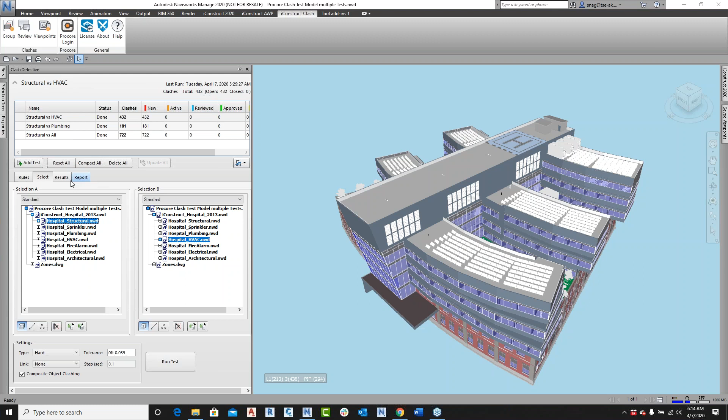But to get started here, I have actually 3 tests already. I've got structural versus HVAC, structural versus plumbing, and structural versus all. I don't have a lot of clashes in here, but there's enough to show you what I've done. If I go to the results here, you can see it's just giving me the clash names. So what I want to do is I want to start grouping these.

Navisworks does a very good job of helping you find clashes, but it doesn't do a very good job of helping you group them all together. And that's what I want to do. I want to reduce these numbers here. So what we're going to do, up here on the ribbon, I have what's called iConstruct Clash. I'm going to go here.

It's really mainly 3 buttons. I'm not going to look to upload into Procore today. I'm just going to do these 3 buttons. So let's go look at grouping our clashes. So this group dialog box comes up, and I can select all 3 of my tests at one time if I want to group them all the same way.

We come with some predefined ones already for you in here. So some of these are already predefined. Some of them I've already created myself. If you want to create your own, you just click in here and you just create one here. I'll just say it's Rob. And then basically you just drag and drop what you want.

So if I want to say, oh, I want the zone that it's in, and then I can specify what's a selection set and the property that I want to use that represents that zone. And then I could say, oh, then I want to do it by level from there. And then I might want to do it by a proximity distance and say I want to do it by 50 feet. And this is all based on the unit. So if this was in metric, it would actually say meters here.

And so this is how I'm going to group my clashes. So it's going to go by a zone, so different area, might be a room, something like that. Then by the level that it's on, and then by a proximity distance. And I'll just quickly save this. And now I'm going to go ahead and say, let's go ahead and group this. So what it's going to do, it's going to do all 3 tests at one time.

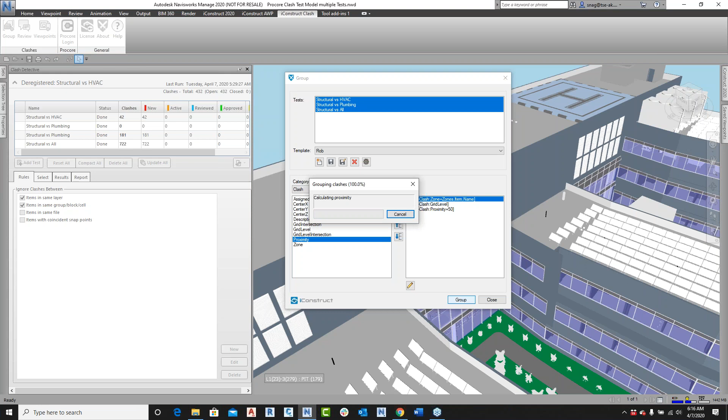It's okay here. I'm going to close this. Now I'm going to come over here. Now you can see the numbers. I had 700 and some clashes before. Now I'm down to 47 here. If I go to the results, now you can see we've actually given them a name that means something. So here I've got zone 3, level 6, and this is proximity group 1.

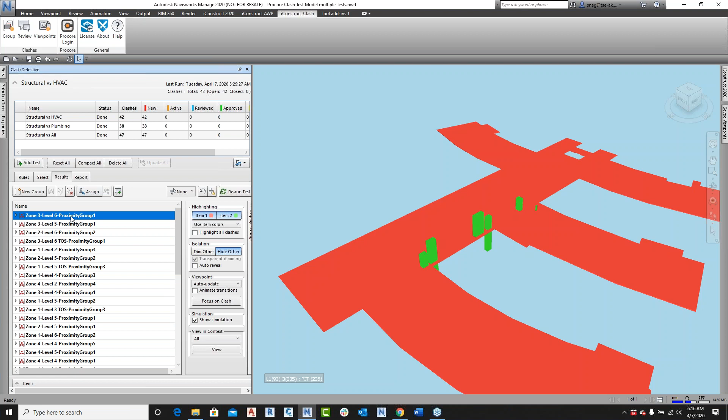Okay, so there's quite a few clashes in there. I could have made that proximity distance a little smaller so it didn't grab as many clashes, but what that was doing is basically saying, hey, if you got any clashes within 50 feet, group those together for me.

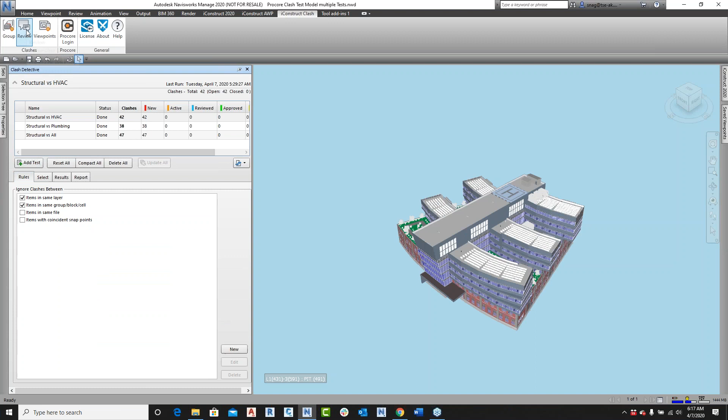So now I want to look at managing these. So I'm going to come up here to what's called the review tool. I'll bring up the review tool here. And this has gone through and it shows me all my different groups in here. And you can see this group here has got 44 clashes. Well, that's way too many clashes for what I need here.

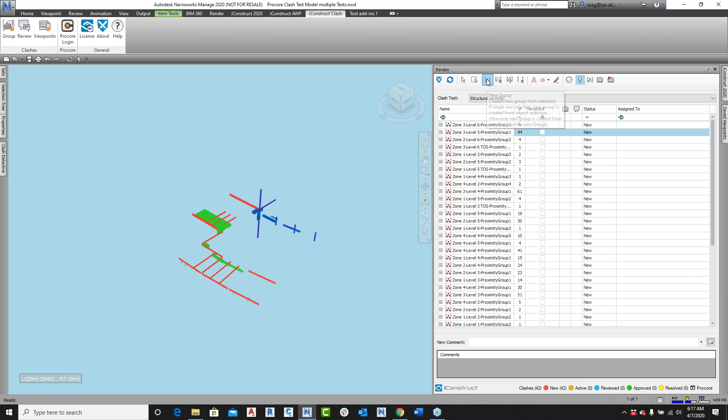So what I want to do is I'm going to say, yeah, I want to take these out and put them into another group. So I can just come up here and say, hey, grab all those and regroup those into its own group. Same thing. I don't really want these here. I want those into another group here. Let me just change the way I'm selecting down to first object. And then I'll just grab that. And that's put that into a group. And then same thing here. I'm going to put this into a group too.

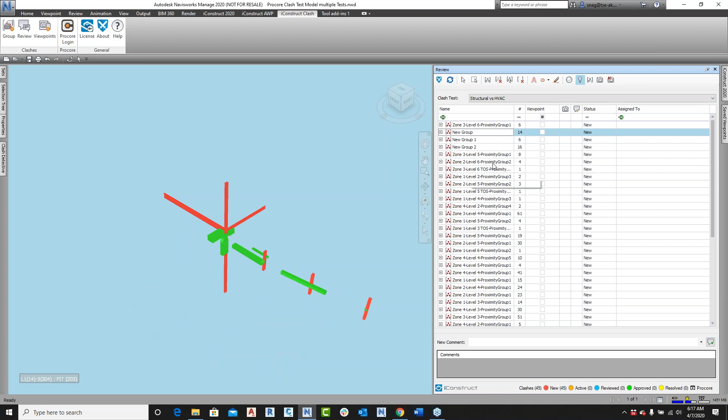Okay. So you can see that you can quickly and easily create your own groups from the ones you already had. We can rename these. We can put in, this is a structural versus HVAC here. I can put in some redlining here. I can put in some notes, and this will save it for you.

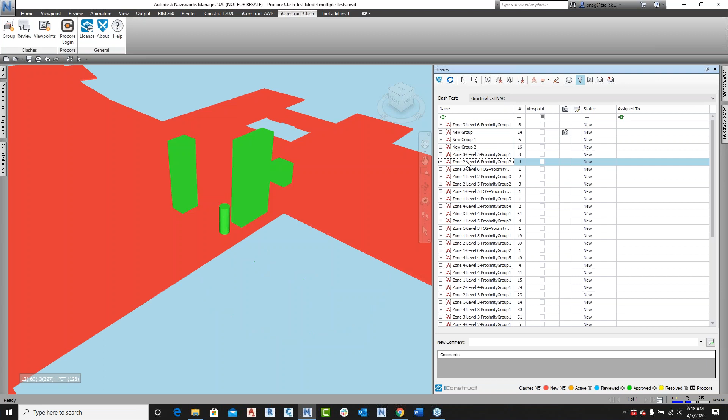Other things that we can end up doing is if I select these, let's just grab a few of these clashes here. I can go in and I can change the status here so that I've reviewed them. And automatically, once you've reviewed them, it puts a checkbox here. So this checkbox means, hey, I want to create a viewpoint, or if you are using products like Procore, that it would upload this into Procore.

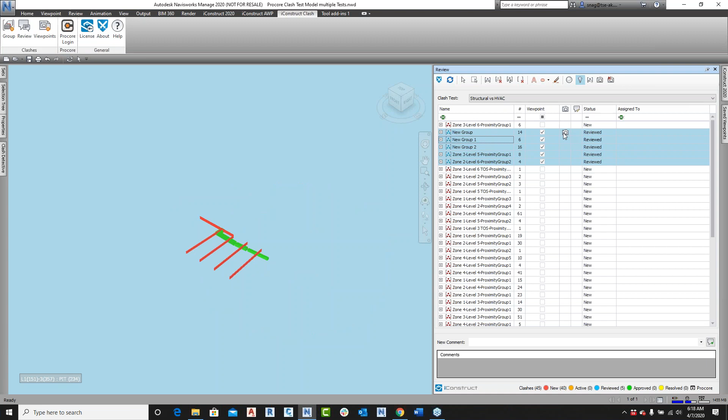As you can see here, the view shows I've created a viewpoint. If I just zoom in and then go to another one, you can see that one automatically grabs that and holds that view for you. And you can also go in and assign them to someone. If you're logged into Procore or something, it'll remember everybody that is associated to the project.

We can also put in comments down here. So I'm just going to say move duct, and as you can see, it remembers ones that I've put in there previously. And now I've added in a note to every one of those. Okay. And you can change the way that you're looking at this at any time. You can switch over to this. All right. So that's done.

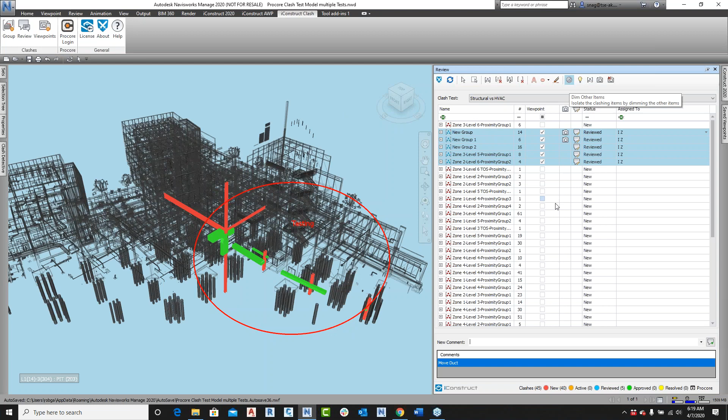There's a lot more we can really do inside this, but I'm going to go ahead and get out of the review tool. And now what I want to do is I want to create some viewpoints. Well, I don't have any at the moment. And so what I'm going to do is go in here to this viewpoints. Same thing. We have some predefined ways to be able to group your clashes or your views. And so in this case, I'm going to do the date, the test name, and then the level that they're on.

Okay. And then right now you can see there's just a box here. And if I expand that out, it's only going to do the ones that I have checked at the moment. Well, I've decided now I really want to do all my clashes, so let's just check them all. So I'm going to do all three groups. And if I just go create here, it's going to quickly go through and create a directory for me.

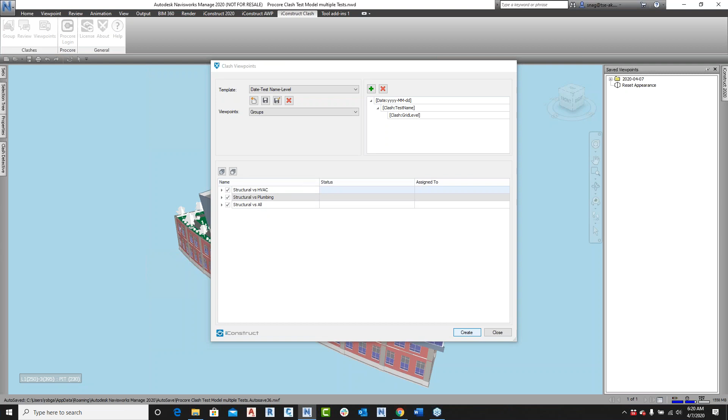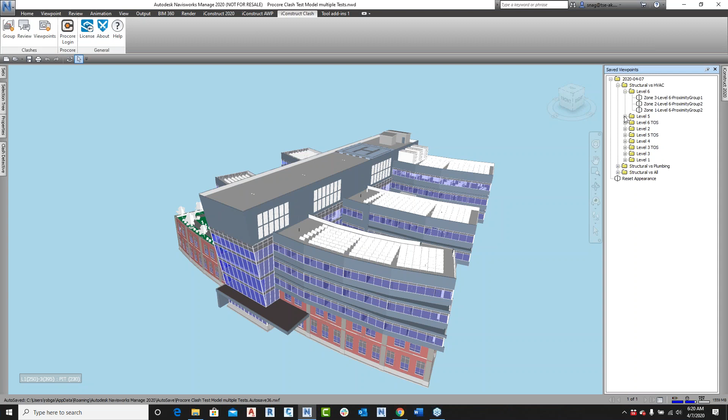Now, if you ever use the ones in Clash Detective, a lot of people go in here and actually create these saved viewpoints. Every single view goes into its own individual folder. Here you can see I've got one folder. There's the date, there's all three different tests, there's the different levels that they're on. If I go in here, you can see these are the ones that I did earlier, and there's that one that I created here. So we're managing all those clashes for you. Okay.

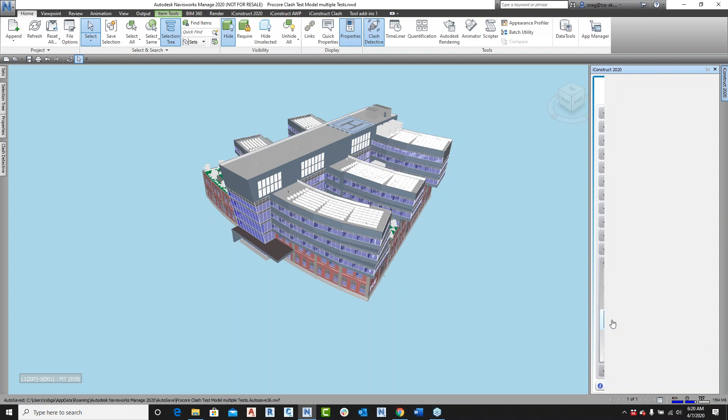Now, the last thing, and this is more in the old version here. I'm just going to turn off, these are my zones here. I'm going to generate a report. So we can actually go in, this is our clash here. I'm going to go in here, say Clash Manager. Oops, sorry, not Clash Manager. I'm going to do Clash Report. Just going to create one quick report here just to show you.

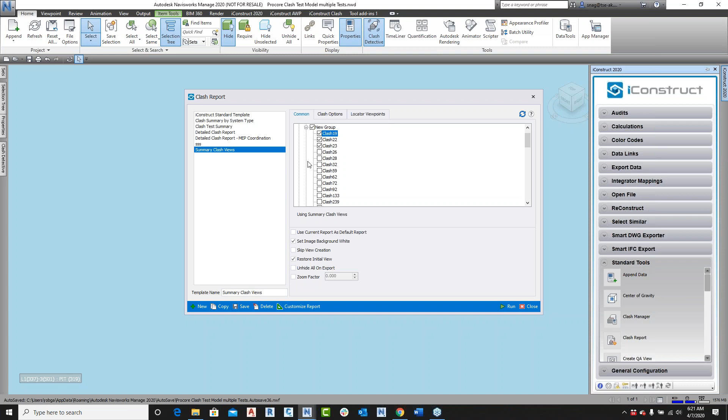So here's the HVAC in here. This is one that I did there. Let's do this one, and let's just do a couple of them in here. And maybe jump over here and do something like this. We have options in here to make things transparent, changing the colors. Whether I want to generate a plan or elevation view, I can do that. I'm just going to go ahead and go run here. Just a very quick, easy way to look at generating some reports.

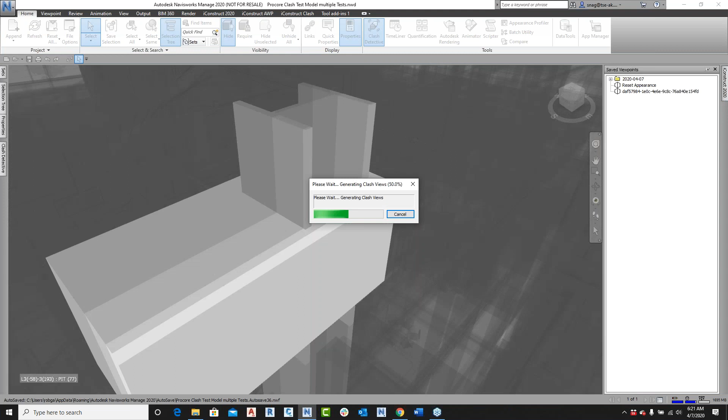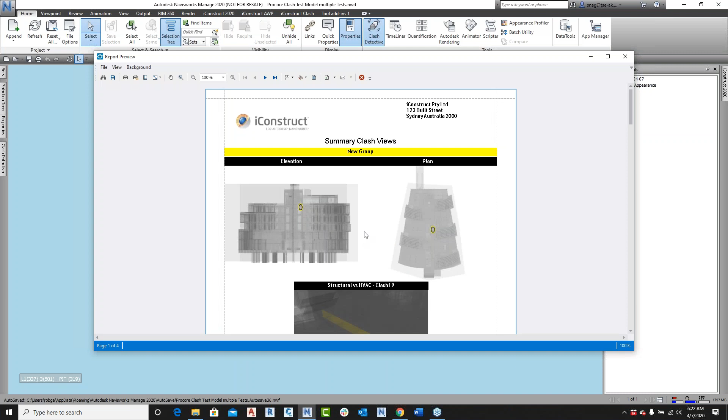And so this is going to create a PDF file, but we can save it out as an XLS file, whatever you want. This is 100% customizable, just what I've thrown together here. So it's going to pop up here in just a second. All right, so this is just a quick little view of it. You can basically see this is where the clash is at in an elevation view. There it is in a plan view. Then it gives you a detail of the clash itself.

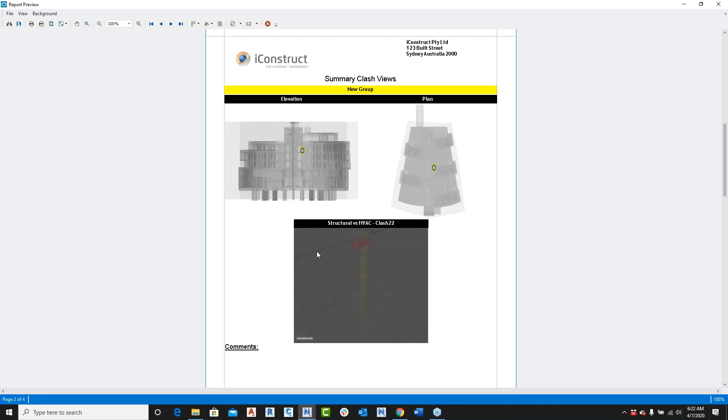And I keep on going down. It's a little grayed out. I could have made my stuff a little bit more transparent there, but as you can see, the two locations where the clash is at, and that's what I should have done. The stuff's just not transparent enough. Okay, so that's the clash module. It's a standalone thing. We do have more clashing in the full product, but this is the new thing out here. It's just really lightweight, easy to use.

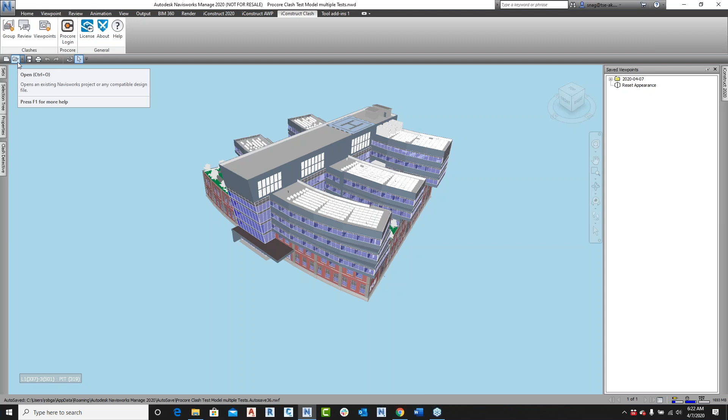So the next thing I want to look at is this exporter bundle. So I'm going to just open up a different model here. Our exporter bundle includes basically three different tools. We have the BCF export, an IFC export, and a DWG export. So we can take any model whatsoever, doesn't matter where it's come from, and we can export that out as any of those. The DWGs or IFCs are the main thing, or you can do the BCF. So I'm going to look at doing the IFC, but I'll show you both of the setups here.

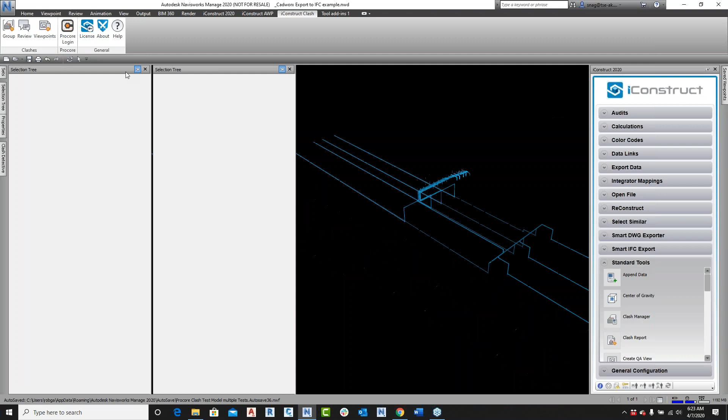With IFCs, we can export it out three different ways. We can export it out with geometry only, nothing else. So when you open it back up, there's no properties on it, but you got all the geometry there so you can see if there's any clashes in a model. Next way is to export it out with data. So I could say, hey, when I export this out, I also want you to export out the properties in here. So let me just turn this on here. So for instance here, if I select on this, grab an item in here.

So I might want to say when I export this out, I want to make sure all these CADWorx properties go with the file, okay? That's great. The only issue with that is when it exports it out, it's a generic object and it has data associated to it, but it's not mapped. It doesn't know it's a pipe. Only the data here shows me it's a pipe. So those are the 3 different ways.

Now I've already got them set up, but I'll show you how to do this. So let me go back in here. I'm going to select a few objects. I'm going to come down to general configuration. I'm going to go down here to the IFC export. And I've already got this done, so I'm just going to show you what I have. So right now, the first one is geometry only. That's it. There's nothing else to do. I just click on new, and it's just geometry only.

Next one is geometry and data. And you'll see here in the middle, I'm actually including all the CADWorx information. Okay, that's it. So it's exporting out the geometry, and then I'm including all the data that goes with it. And it's very simple to do. You just basically come over here and drag into the middle what you'd want. So if I wanted to include something else here, I could say, include all the AutoCAD information too. And so now you can see I've got AutoCAD there.

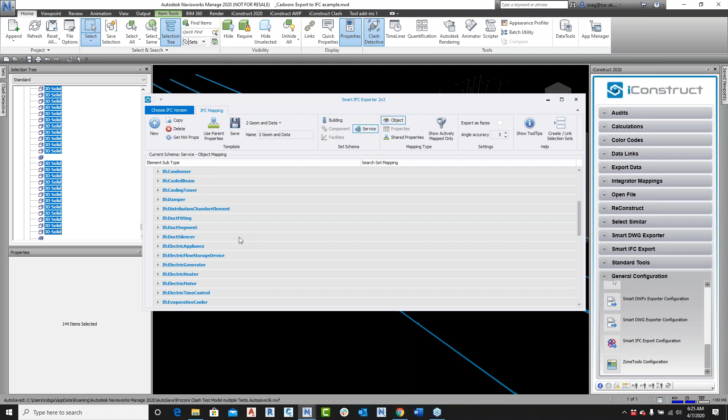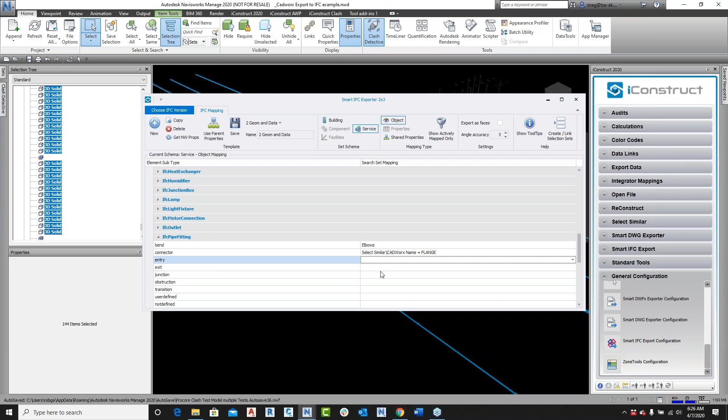So for instance, if I come down here to piping, what we can actually do is in here with the piping, I can go in and I can pick, oh, bends are all elbows. What else do we got here? We've got some connectors. So let's map all my flanges to be connectors. And let's go a junction here. These are all T's, and so on. And then for my pipes, I can do the same thing. Here's the pipes. I won't say it's flexible, I'll say it's rigid. And I have a selection set or search sets that grabs all the pipes. And now they're going to be mapped to this rigid segment.

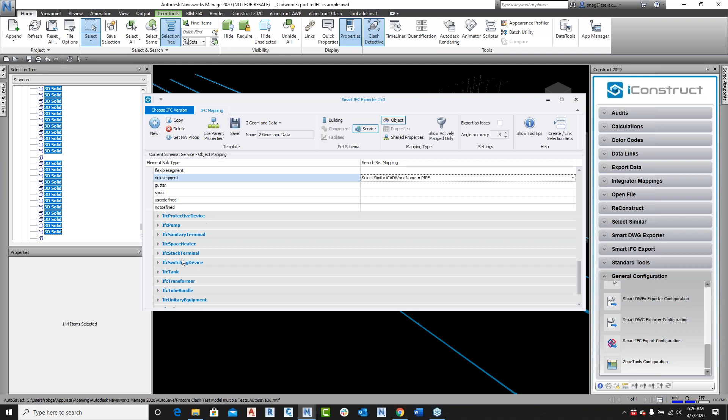Okay. And then on the last one, I could go down and I could select the valves or something like that. So I didn't actually grab that one. That's why they weren't set. Do you want to save this? No, I won't save anything here. All right, so that's what they are. And like I said, I've already got these things set up. Right here are the 3 different ways.

Now I want to show you the DWG, and I'll make one quick export also. So if I come down in here to the Smart DWG export, this is the one I'm using here. So there's my template name. You can export it out as a mesh, solid, or we also do a 2D hidden line view. This is a plan view. So if I happen to go to the top view here, I could export that out and it'll give me a 2D drawing. I can export it out as metric or imperial, all as one layer or multiple layers.

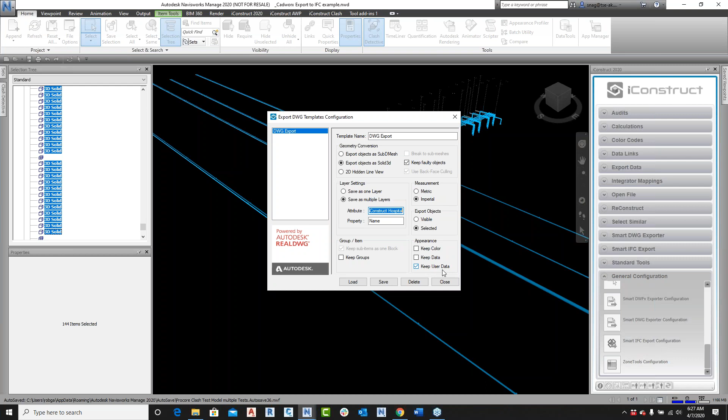And when you say multiple layers, you're just picking a property that you want to use for that layer. What are you going to export out? Everything that's either visible or selected on screen. And then here you have the ability to either keep all the data in the model or just keep the user defined data, which I'll show you in a moment. Okay.

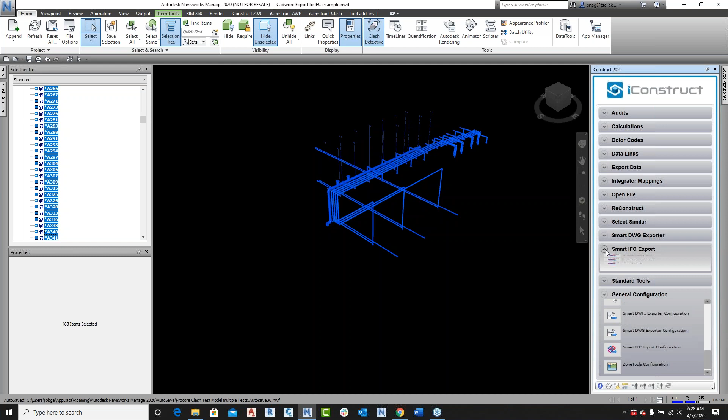So with this IFC, IFC doesn't give you the ability to export it out as a selection or whatever's on screen. It only does whatever's on screen. So I'm just going to grab a few items here like this, and I'm just going to hide everything else. That's all I'm going to export out. I'm going to create an IFC file of just that data. And so if I go here to Smart IFC, I have the three options: geometry, geometry and data, or mapping. I'll go ahead and do the mapping one.

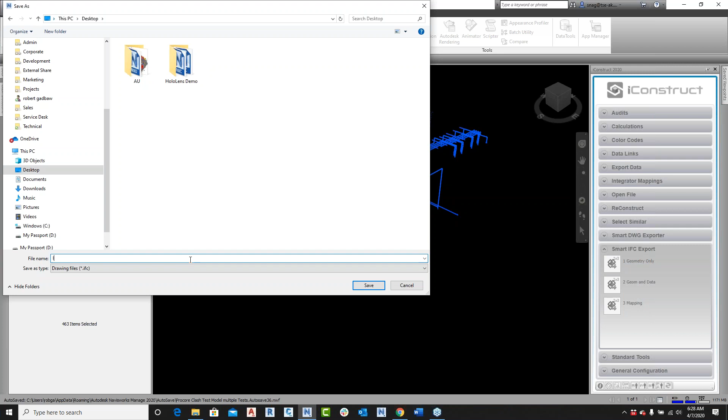Project name, organization, site, building name, and author. You don't have to do this if you don't want to. I'm not, for time-wise. And then I'm just going to throw this right on my desktop here, and I'm going to call this one IFC Export. And I'm going to go save. And so it's going to go through and export this out.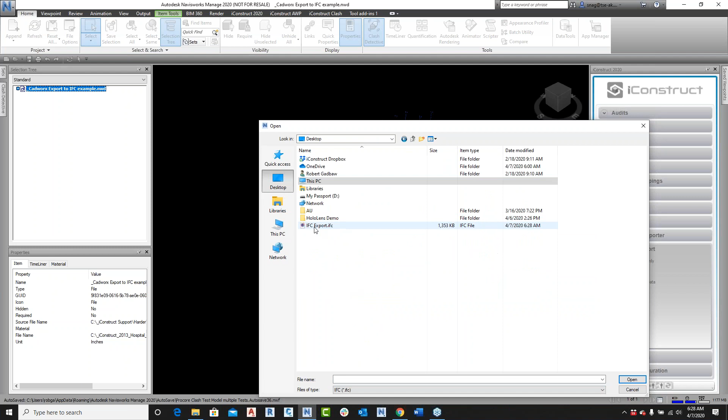This is a very, very popular tool for us. So it only took 4 seconds. Not everything always takes 4 seconds. Sometimes it's very long. But let me just go back to my desktop. Let me open up this IFC just so you can see what I've created. So this is the one I just did. I'm not going to save that.

All right, so there's the model. See what I have there. If I come on over in here, there's the project, site, building, level. Because I mapped it, these actually say pipe, reducing T. There'll be some things possibly in here that don't say it. I maybe didn't get everything mapped, but looks like I did a pretty good job of it. So that's what you would actually get. If you had done it with data, these would all be generic objects if you didn't map them. And I can expand these things out, and you should see the CADWorx information is associated to it.

Okay, so that's our IFC export. And like I say, DWG is very similar, it'll just create you a 3D DWG. So that's the IFC and the exporter there.

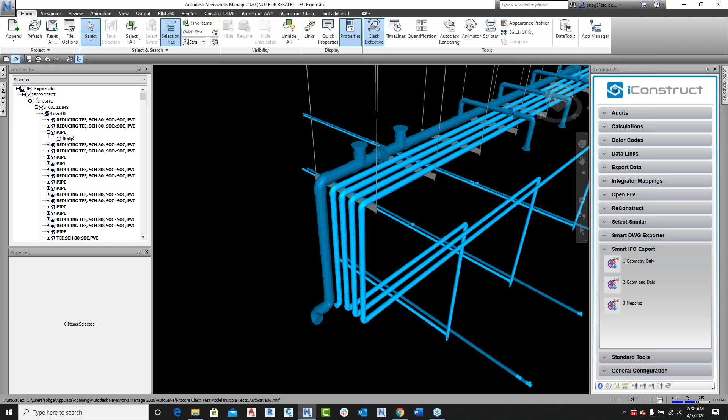So next thing I'm going to do is we're going to look at now the full version of iConstruct. Full version of iConstruct includes everything. So the first tool that I want to show you, though, is what is called Reconstruct. Reconstruct is a very powerful tool. It's overlooked, and actually I'm going to show you something else first.

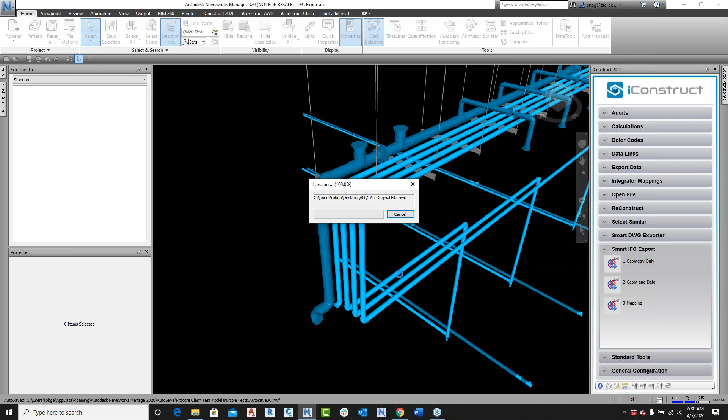I wanted to show you a large oil and gas model here. This is just a typical situation for people working with oil and gas. So even if you're not in the oil and gas industry, you're probably getting these models, and you get the models from different sources. So if I expand out this tree here, you can see all these different files that I've got pulled into this one model. These files have all got different structures, coming from completely different sources. So if I expand that out, you can see this is like going down to 7 different levels here. But if I come over to a different one here like this, there's 1, 2, 3 levels.

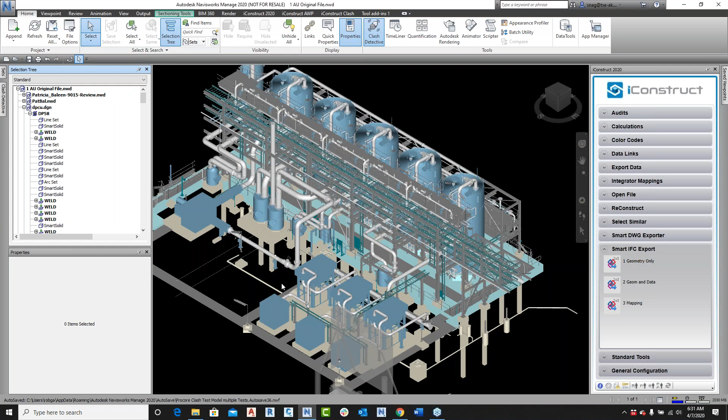So very hard to work with this file. This file is a lot bigger than it looks too. I've actually got sectioning turned on, okay? Well, a lot of people now are uploading their models into HoloLenses, and sometimes these models are just too big to do that. So we have a tool called Reconstruct.

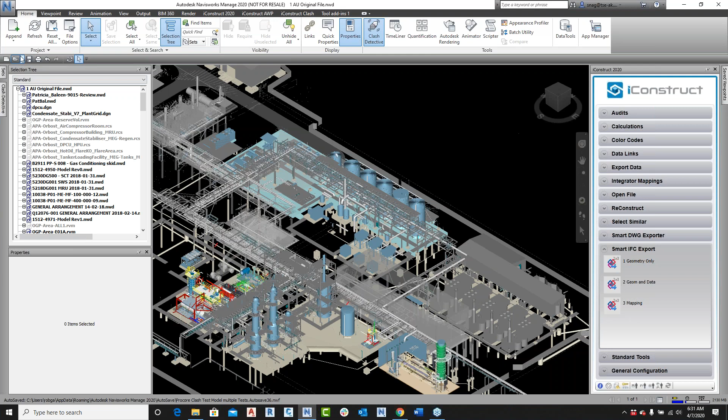Reconstruct allows us to break up our models into smaller portions, but it also allows us to organize the tree here. So just remember this tree. I'm going to open up this other file, and then I'm going to show you how this works actually. Look at the file difference here. This one's 11 megs compared to 370 megs.

And what I've done is I've taken that area and I've cut it out. I physically have taken the model and cut that portion of it out. But the main thing I want to show you here is the tree view. Remember all those different files. This is a real job, by the way, too. I expand this out. I took all those files and reorganized them all to 3 levels.

So I have a layer level, which is my discipline. I then broke it down by a line number in this case. And then I broke it down by each individual part. So I've got an item, a group, and a layer. Okay, so now I'm going to show you how to do this live.

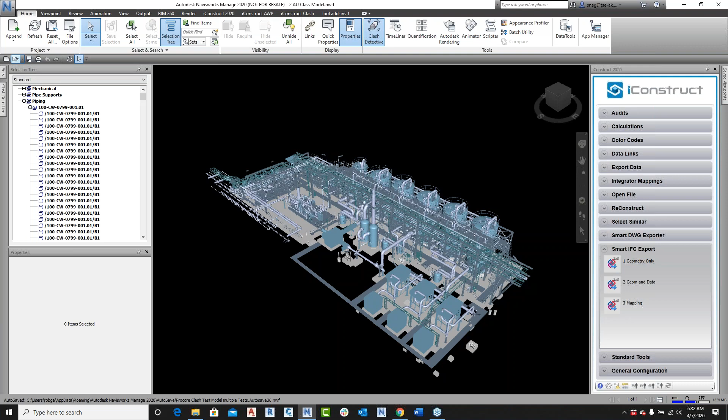So let me go in. I'm going to grab my model, just a smaller model to reconstruct it. So this one here, this is a Tekla model. This is a classic model that a lot of people get. They get models from Tekla all the time. This is the way they come in. You got this: not in use, undefined, undefined, undefined.

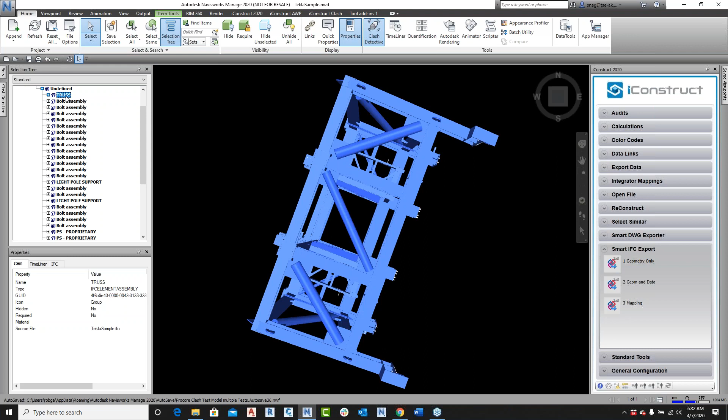Then I've got truss. I highlight truss, everything gets selected. And then I got bolt assemblies. I expand that out, I got angles. Expand that out, it says body. Tells me nothing, I have no idea what this thing is. I have to come down in here to look at all the properties of it, okay?

So what we can do, and I'm going to change mine up a little bit to show you, I can reorganize this tree, but I'm also going to chop it up too. So let me go in here, let me go to viewpoint and let's go enable sectioning. I'm going to do a box. All right, and we're just going to rotate this thing here. Let's go turn it this way here, let's rotate it this way, and then I'll just scale this up.

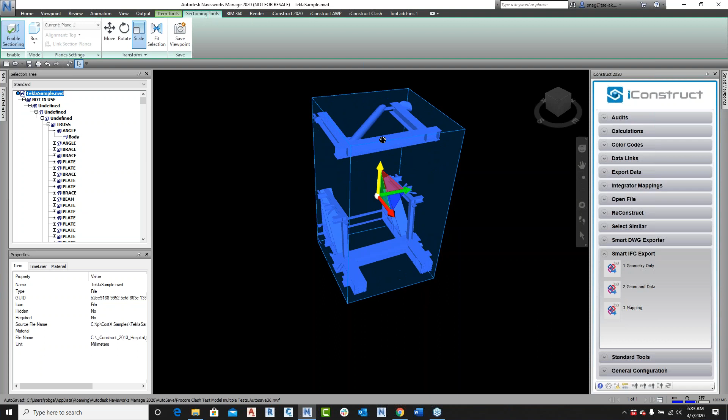All right, so that's what I'm going to export out. If I take off the sectioning, you'll see it's a lot bigger, okay? So I am going to leave the sectioning on. That's what I'm going to export out.

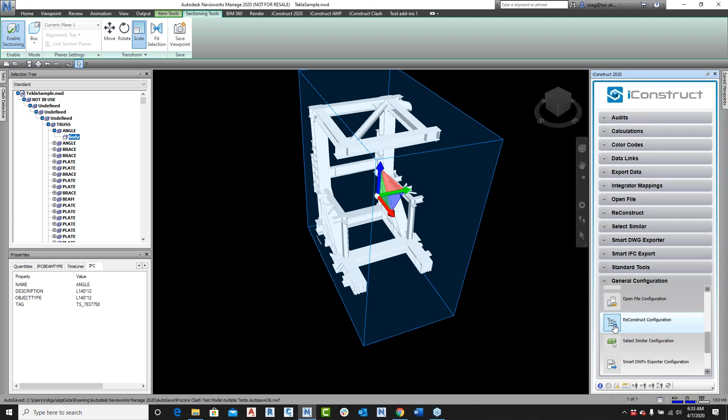So I'm going to come down here. Let me just show you what we're going to do here. It's going to be very quick. Here's my IFC tab. So what I'm going to do is I've got a reconstruct here, and I'm going to do Tekla. I'm going to load it. And this one I'm going to say export everything except hidden.

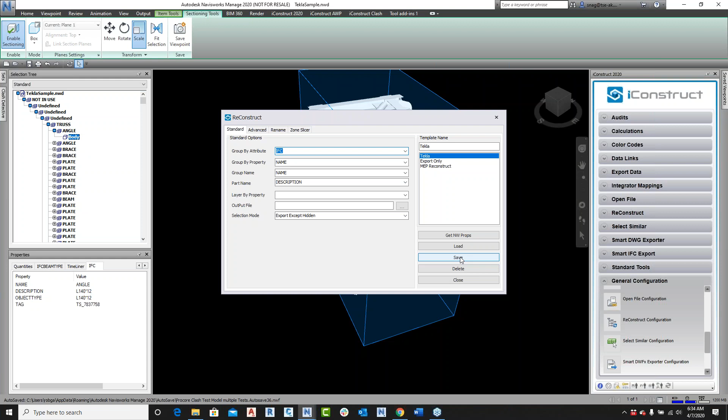So basically I'm saying, hey, go to the IFC tab right there. I want you to group everything based on the name. So the angle, and then the parts are all going to be called whatever the description says it is, okay? I don't want it to be, say, body. I want that to say L140 by 12, okay? So I'm just going to go ahead and save this thing and close.

And now what I'm going to do is I'm going to come up here. I'm going to go to my reconstruct. I'm going to run my Tekla one. And I'll just call it Tekla sample reconstruct. I'm going to go save.

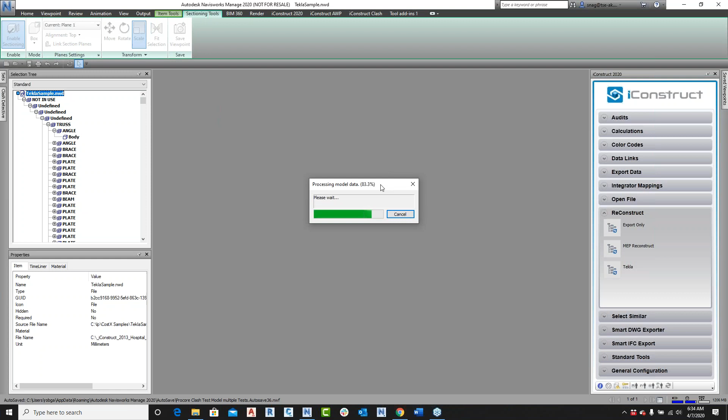This takes a few seconds here. But basically it's going to go out, it's going to export that out, and it's going to physically trim the items. Ooh, that wasn't good. Shouldn't have done that, but let me, still going here, hang on. Ah, that's weird. Must have had another session there. So let's just try it. Never seen a message like that come up and not crash your system, but here's the model here.

And there you go. This is what I just exported out. But now look at the tree view. Okay, so I don't have this undefined and everything. I totally took that model, and now all my angles, my beams are grouped together, my braces are together. I got my plates. If I expand these out, it doesn't say body anymore. I've actually given it the name, but I keep all the data.

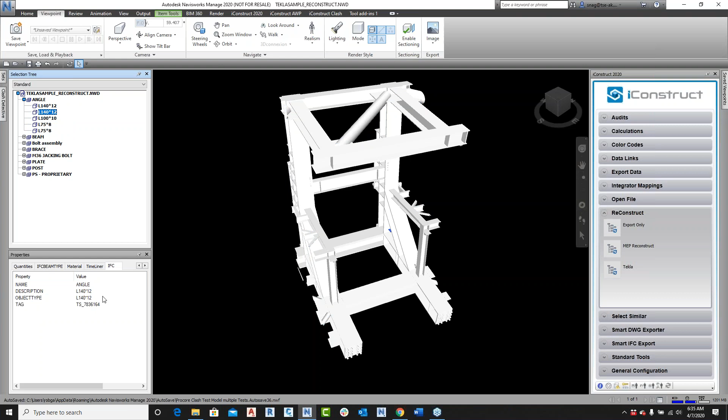All the information is still intact here. All we're doing is just reorganizing this tree and breaking up your model into categories, but all the data is still exactly the same. Okay. So that's the reconstruct tool.

Next tool I want to show you is what is called, two of them, integrator and append data. So when I reconstructed that model earlier in that oil and gas model, I basically need to have all the data onto one tab, okay? Every single thing that you want to export out needs to be on one tab. So I can't pull data from one tab when I'm reconstructing and using another one from another tab. I need it all on one tab.

So what we have here is what's called integrator. Integrator allows me to go to different tabs and pull information from that tab and pull it onto a new tab. Okay, so that's what I'm going to do.

And as you can see here, at the group level here, I don't really have any properties. There's nothing here really. If I go to an individual item, I've got a lot of data, probably a lot more than I ever need. Okay, that's what a lot of people complain about. They're having to jump around to find all the information that they need.

So with integrator, I'm going to go to this one. I'm going to run this one just on this here real quick. I'm going to say HVAC standards, one I've got set up. It says 4 groups and 424 items. You can now see I've got a new tab here called iConstruct Hospital. If I click on that, now you'll see it says system name, system type, a level, and a work set.

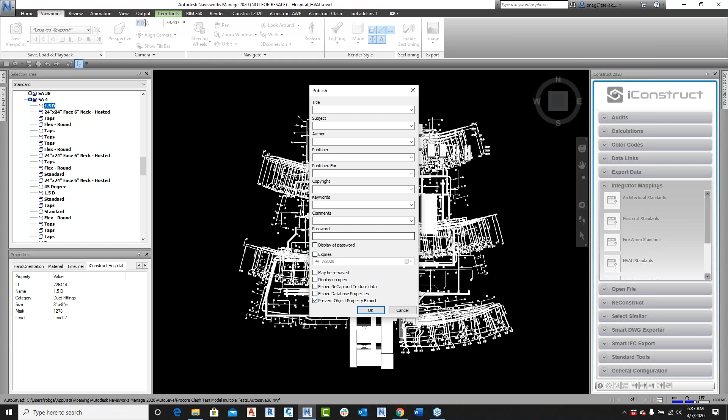Now, what a lot of people don't know is if you ever use this publish command here, there's an option down here to say prevent object property export. That in itself will reduce your model size. But what you can do is if you publish this right now, it would rip out all those other tabs and really just leave me with the timeliner, my iConstruct tab, and the item tab. It would take all those others out of there.

Because I got this user-defined tab, I can also manually add some new data to this. So let's just do this. I've got this Append Data tab. I'm going to say I want to create one called status, and the status here is installed. I'm going to apply it to all the items and groups, create that tab if it doesn't exist, and I'm also going to change the color. So if it's installed, I want it to be colored green.

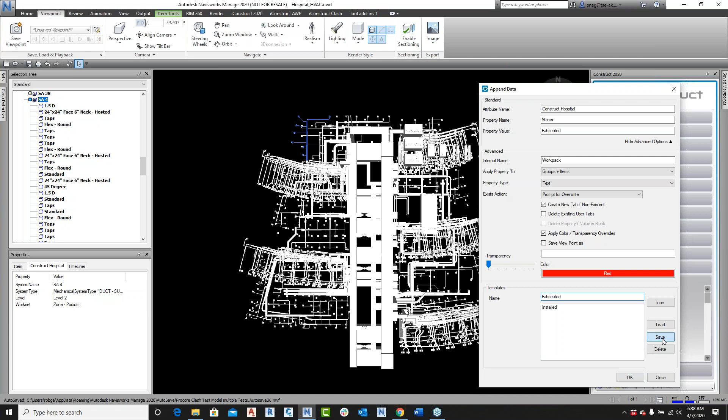I'm going to create another one in here. I'm going to say it's fabricated. And if it's fabricated, I'm going to say it's red. Fabricated. I'm going to close that.

Right now you can see I've got the iConstruct Hospital tab here, and I got two buttons here. If I click on this and say it's installed, you can now see I've got a status here installed. Every single item now says it's installed and it's changed to green. I can go in here and say, hey, let's grab that. Oh, that's fabricated - that automatically creates that tab and throws in that status. So you can go around and just start grabbing on different items. So you can have your different team members be able to do that.

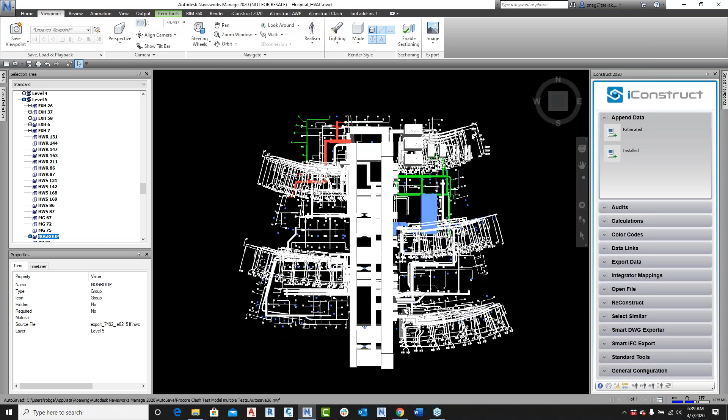Now, a question often comes up: that's nice, that's great, I add all this data in here, but what happens if I get a new model? Are my people going to have to put that back in there again? Technically, yes, but that's what we have is what's called Bim Flow that I could show you here later on. But what we would actually do is I would export out that data. We have the ability to export out information - I'll show you that here soon too. But let me just show you here.

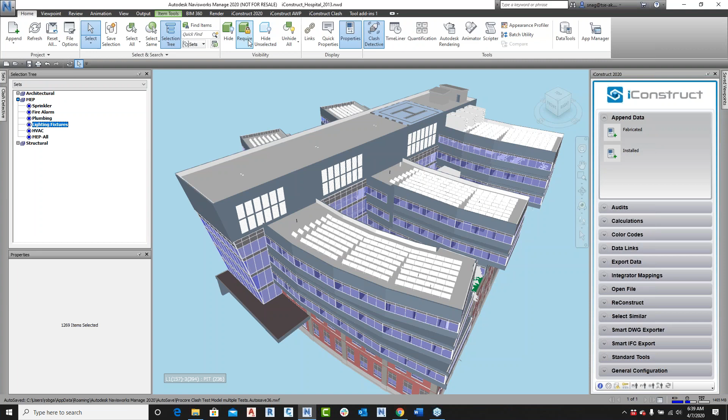Here's a whole bunch of lights, okay? If I select one of these lights, you'll see I've got that iConstruct Hospital tab already created. You can call this tab anything you want, by the way. You can see an ID, name, and a category. I'm going to say, yep, that's installed, and now you'll actually see I've got the installed there and it is green. What I want to do is write in a bunch of data - say I had all those statuses, I could export out all those statuses and then write them back in at any time.

So if I go here to data link, I have one already set up. I can data link in an Excel spreadsheet, an Access database, a SQL server, whatever kind of database that you might have. So I'm going to go ahead and run this. This is going to go through - it's going to take all that data in my database and write it in there.

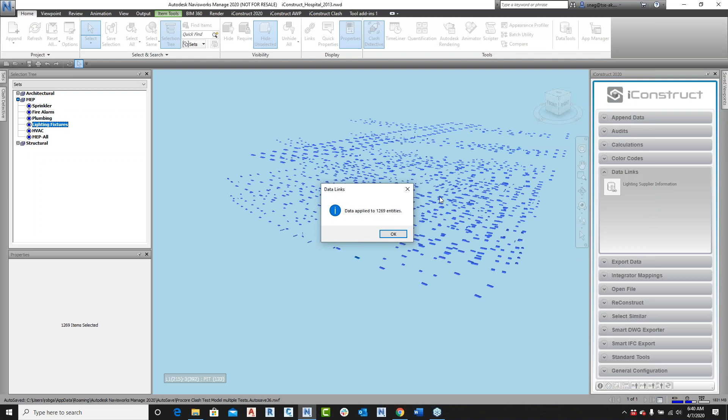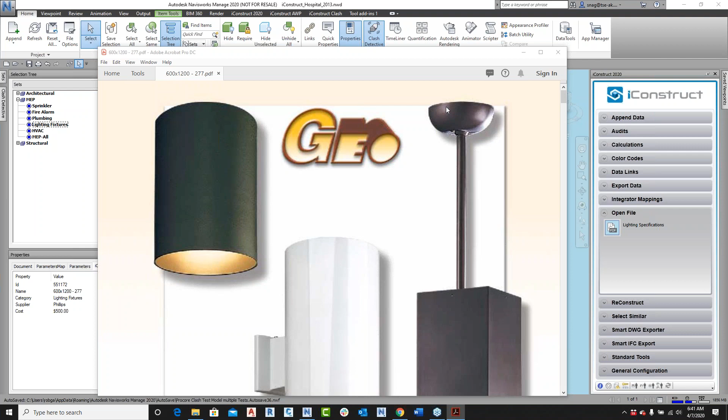So now if I select that same light I had before, now you can see I've got a supplier's Phillips and a cost. Every single thing in here now has that. Now this one's the only one with the status because that's the only thing I've added. So you can take any kind of database - we physically are writing it into the model, okay? We also have a tool, if you've got PDF files and stuff, that will go through and open up files for you. Any PDF or DWG, we have that ability also.

A couple more tools and then we'll wrap it up here. I know I'm throwing a lot at you, but there's like over 40 different tools. I'm trying to show you the main ones here.

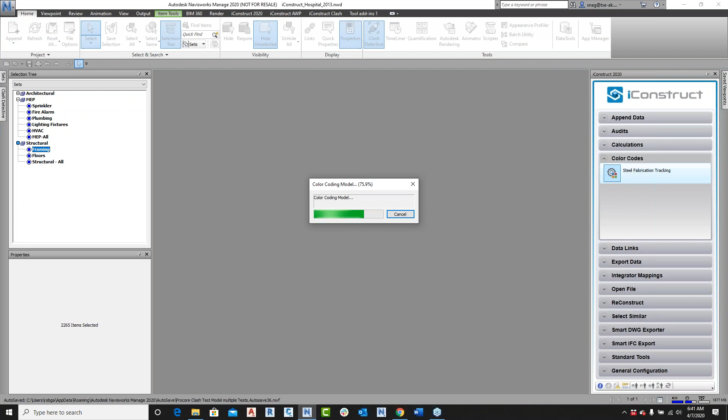Next one I want to show you is color coding. So we can color code our model based on a database too. The statuses I put in there earlier manually, I could have all that information in a database and link it up to the model, and it'll automatically color code the model based on that database, and create a little legend. You can generate reports from this. So there you can see here, it's just color coded. Everything there in red hasn't even been fabricated. The stuff in green there is received and shipped. Whenever you see something in gray, that means it wasn't colored at all - it's not in the database for some reason, or there's no value. So it's something that they need to look at.

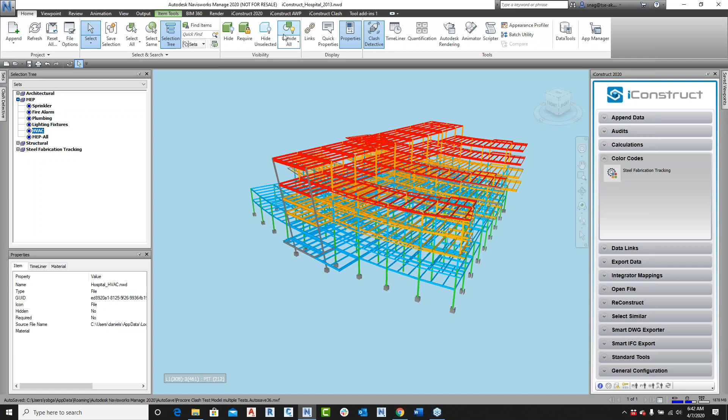The next tool I want to show you is what is called Audit. Audit allows you to go through and break up your model based on any property whatsoever. In my situation here, I've got a whole bunch of HVAC systems. So I'm going to just grab a few systems here. I'm going to do the whole model. I'm going to come up here to Audit, and I've already got one set up, says Isolate System Names.

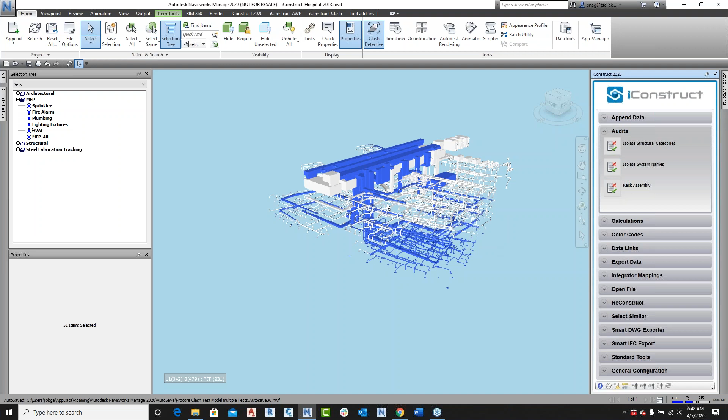And so all that's going to do is create me a viewpoint and a selection set of every different HVAC system that I have in this model. So I'm just going to quickly run this. This is pretty quick. It doesn't take very long. And I'm going to go over here to the viewpoints. And this is what I just did. Isolate the system names. And I've gone through and I've generated viewpoints of all these.

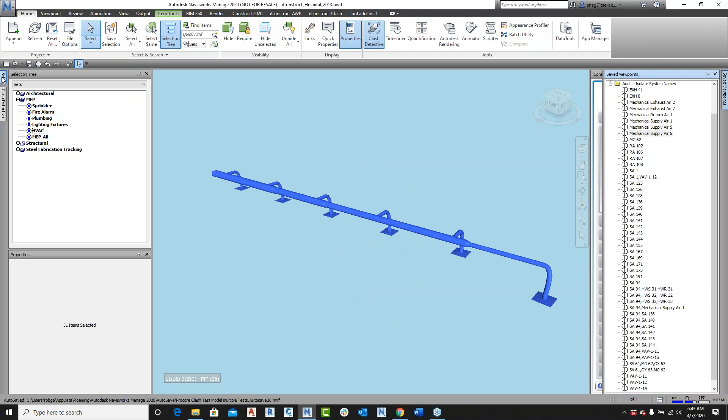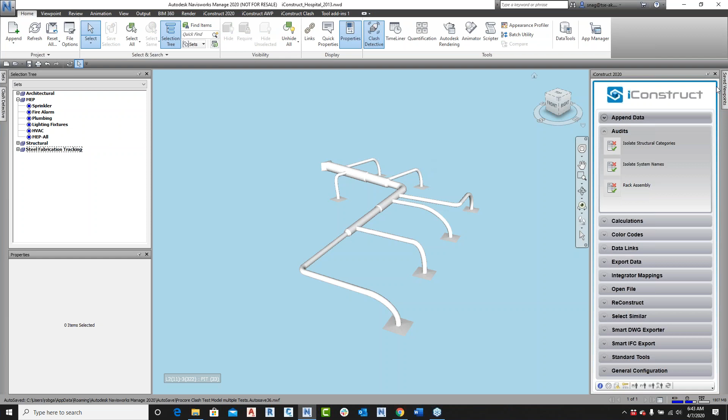And actually I didn't create sets, but that is an ability. I could have actually said create sets out of this also. Okay. So I'm going to look at generating a report here. Let's do this report, mechanical supply air. Let me change the color of this too, just so it shows up a little bit better in my view report here. Mechanical supply air, that's one we're going to run there.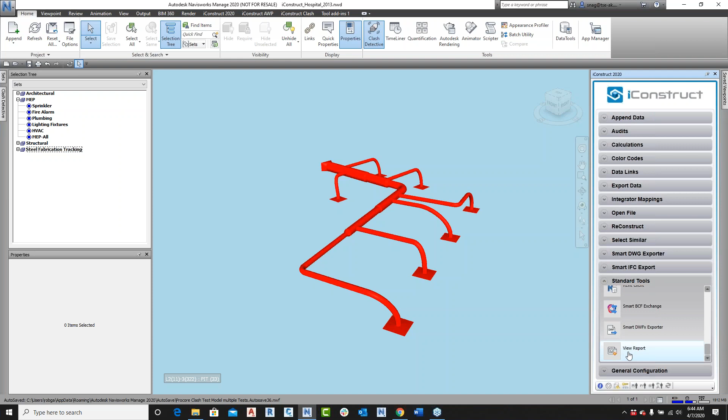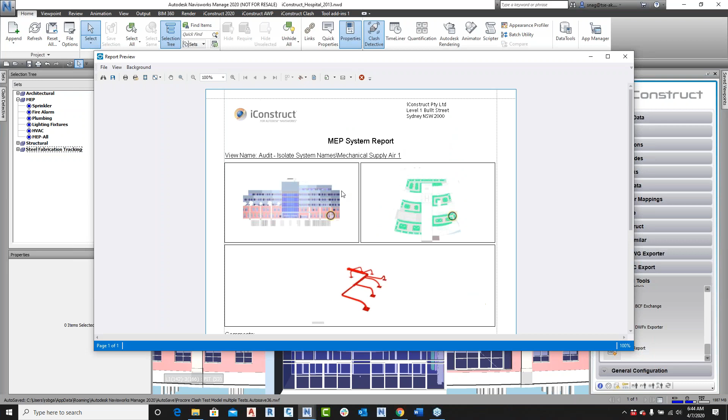All right, and so we'll come down here to standard tools. Let's just generate a view report. Let's do this one, and let's just see what happens. So this is similar to the Clash view report. It's going to create a plan view, an elevation view, and here it's come up in here. And this is actually giving me a list of all the different components and the count of them all. So 100% customizable. Do whatever you want with it.

The last main thing here really to show is exporting. So we can get quantities out of this. So I can take all those doors, I can go in here, export data, and I'm going to go door schedule here. I just did this right before our little meeting, so hopefully it comes up okay. And it should be coming up. Showing a preview somewhere. It might have gone onto another screen, maybe.

See if I can do that again. For some reason it looks like it's on another screen. Door schedule, or it's very, very small.

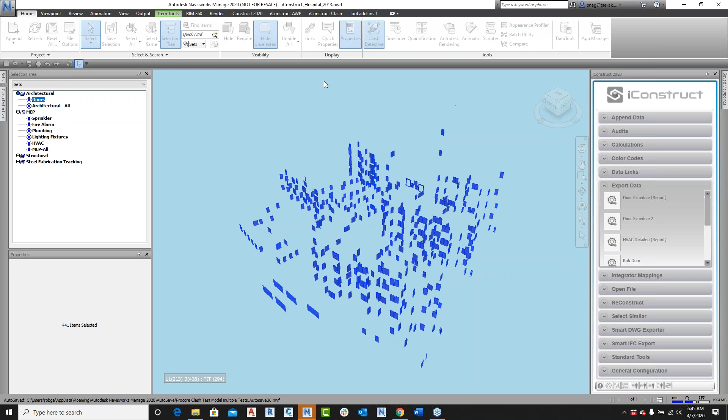Robert, this is the beauty of a live show. Yeah, I know. It is. Definitely. It happens.

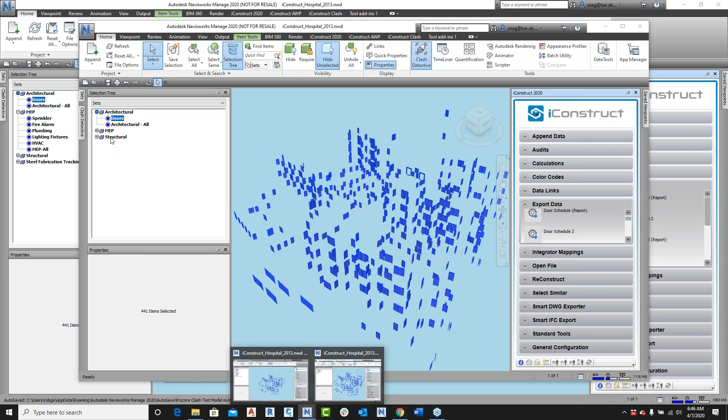I'm going to do one other thing here. Let me just try another session, see if it'll open up very quick. Yeah, no. I definitely am a live show guy. So let's try this. Export. It's flashing, but it's not coming up. All right, one last thing. It's actually coming up somewhere. I've got 3 monitors, but I can't see it on either monitor.

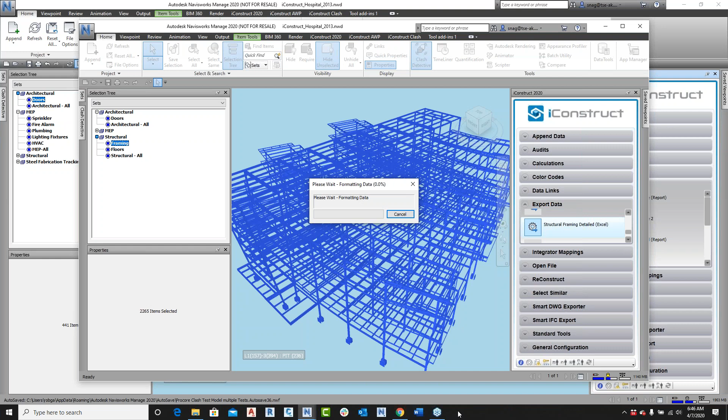Let's try framing. I'll do structural framing and see if I can get something out of this one. So I do have another one here. This isn't a PDF. I got structural framing. This is just going to come up in an Excel spreadsheet. Just to give you another example. But I basically have just taken all that structural framing. You should see Excel flash up here in a second. And there's the Excel, and there it pops up.

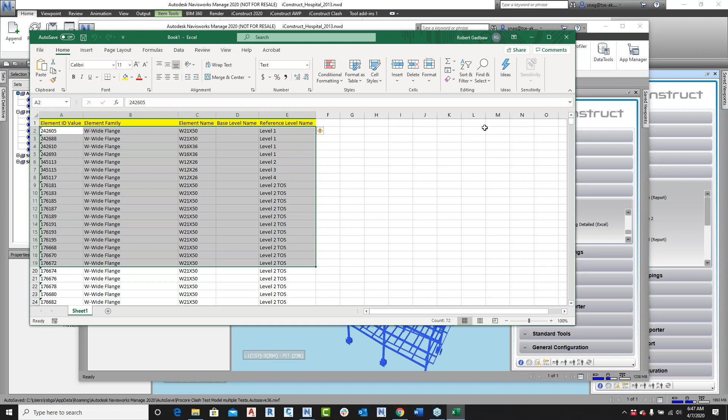So there I've exported out. So you can get quantities showing you the steel. I could have got a count of how much steel of a certain size on certain levels and things like that. So all that's possible. That's basically it for me. So questions? I've got 10 minutes to spare.

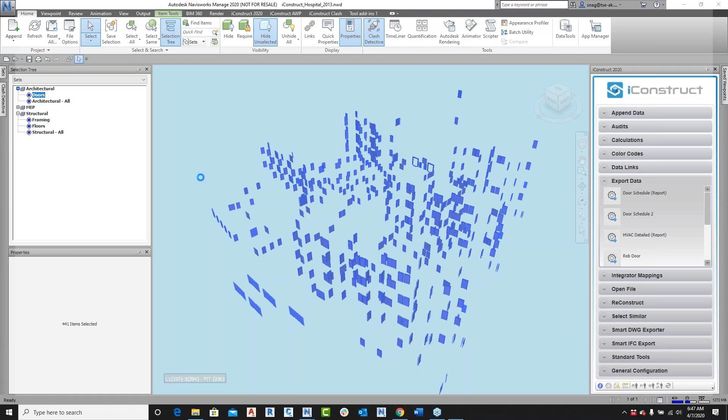Try this door again. Maybe we can check BIM Flow too. Oh yeah, sorry, big one. That was a big one. Thank you, Matea. No worries. BIM Flow. So BIM Flow is an extra. It comes with iConstruct now. This is a way to automate all of our processes, and we can schedule these things to do them at nighttime. So for instance, here, I'll just create a new job real quick.

I'm just going to say this one's, all right, can't even type this morning. All right, and I'm going to go okay. I'm going to right click on this. I'm going to go into design workflow. All right, so this is going to come up with a different looking interface.

Basically what you have here is all your iConstruct activities. Then we get into what's called standard activities, and then you get some advanced stuff. But it's as simple as dragging and dropping. So you'd say, oh, I need to start Navisworks. Once I get Navisworks started, what do you want to do? Oh, I need to open up a model. So let's go up here and let's go open up a model. And you just come over here and you specify the model name that you want to open up.

Okay. Let's say I want to export out an Ifc file. So what do you want to export out? I might want to export out a selection set, because as you know, the Ifc only exports what's shown on screen. So I'm going to go select a view activity, or sorry, a selection set activity. And I just come over here and I type in the selection set. So it might say pipes, let's say. That's what I want to export out.

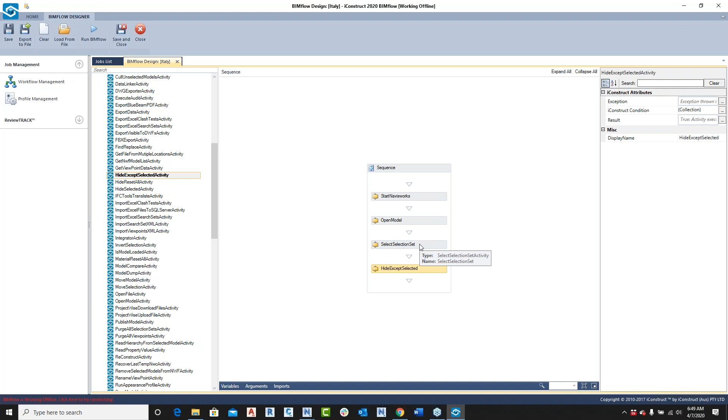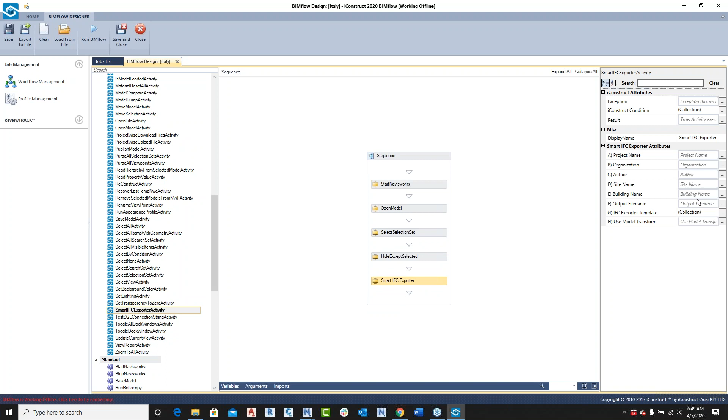And then I now need to hide everything except what I have selected on screen. So now I've hidden everything. So if you just think about what's happened, I've started Navisworks, I've opened a model, I've grabbed a selection set, I've hidden it, and now I want to do the Ifc export. This is always a hard one to find. There it is, Smart IFC Exporter. You'd specify the name of where you want to do it, and then you'd pick, I don't know if I've got one in here. I'm doing some stuff with some HoloLens right now. And then you'd specify how you're going to export it out.

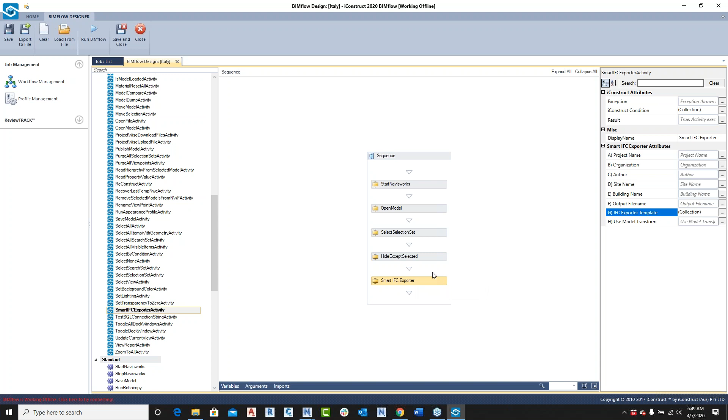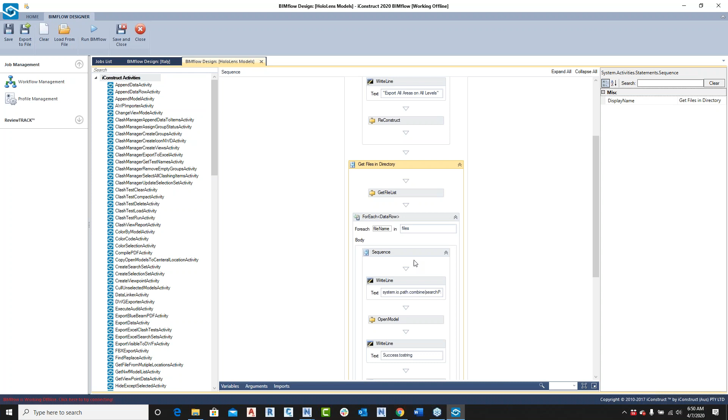So you build these up, and then you can run these with Windows Task Scheduler to run on a nightly basis. I want to just show you one I just did for some customers for HoloLens. Basically what this does is it starts Navisworks, opens up a certain model, and breaks up the model into all these different areas. So they create 35 different models. Then once those models are created, it opens up each individual model stored in a certain location and exports those out as Ifc files.

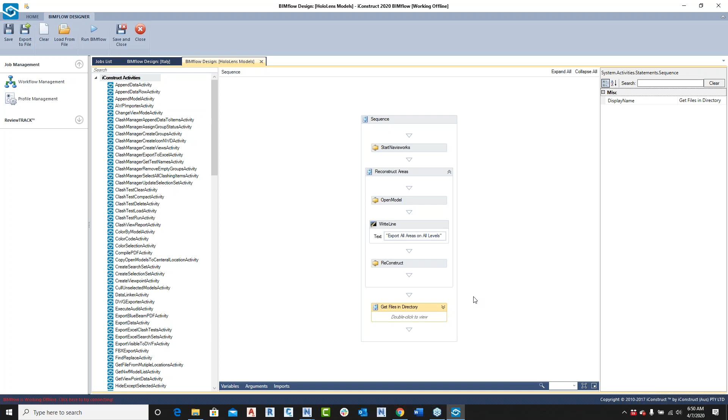Like I say, there's 35 NWDs. They'll create 35 Ifcs, and this will run every single night. So they have the latest models every day to be able to upload into their HoloLens and stuff like that. But yeah, you can build as many as you want. These are all just different jobs, and have them scheduled at different times to run, either at night, during the day, whatever.